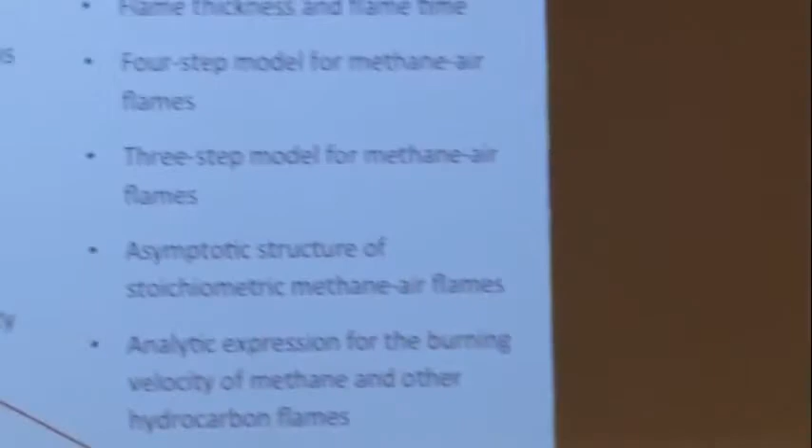So we talked yesterday about two things I want to point out. We talked about the analysis of the four-step, or really the three-step, model and the asymptotic structure that results from this, and then also an analytic form of the burning velocity. And it is quite revealing.

There are a lot of things that are interesting here. This was from the... You see, for example, how this burning velocity depends here on the fuel mass fraction is linear. You see how it depends on the inner layer temperature.

There's a lot of stuff hidden here in these rates and equilibrium constants. And then this is interesting: it depends on this temperature here, or this Zeldovich number, to the fourth power, which is the adiabatic flame temperature minus the inner layer temperature, to the fourth power.

And because at high activation energy, we said yesterday that difference is very small, actually. You can imagine that now when you change the fuel mass fraction — I said it's linear in the fuel mass fraction. That is right, I mean, that's the way you see it here.

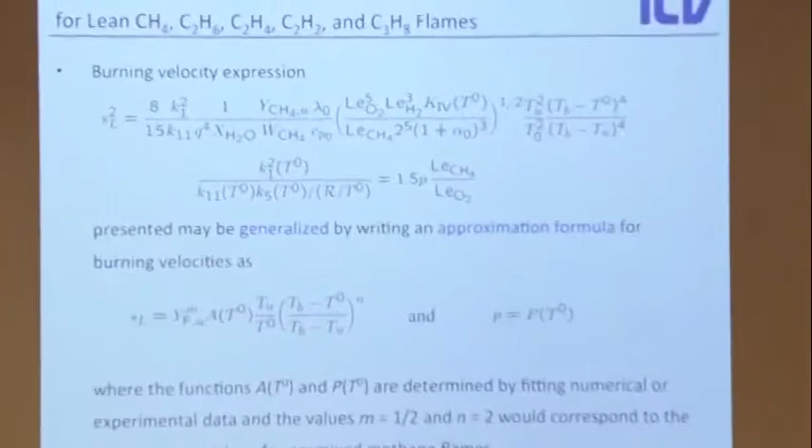We think the unburned temperature has a strong influence. Of course, the unburned temperature adds to the adiabatic flame temperature, but really, the unburned temperature here — this is a large difference anyways, this doesn't change very much. But this here, it would change a lot. So that's one of the things to take away from this.

And then last time we looked at — we said, okay, if we want to come up with a fit for the burning velocities, then having the right basis function for a fit would give us a very accurate fit. But now we have an analytic solution that was derived with some assumptions, but it's an analytic solution. And that analytic solution gives us an idea how a basis function should look like.

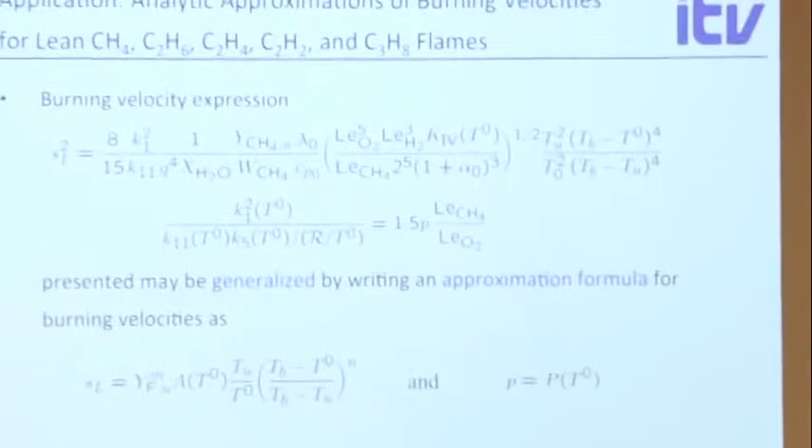And so we do something like this: pressure here is an exponential of temperature, which is what all these K's here say, really. And then we keep this form here to the nth power, and so on. We keep the T naught here explicitly in the fit function. And so this here just has a few constants.

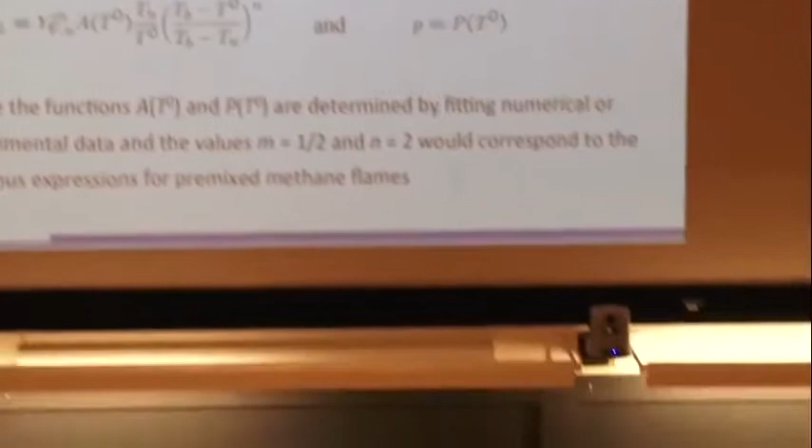Okay, so that is that, and then we said we want to talk here at the end briefly about flammability limits, and the reason why I repeated what we did last time is because it's related to this also.

So lean and rich flammability limits are a function of pressure and temperature. Lean and rich flammability limits are basically what happens: you have a flame, it moves. If you make it lean, it moves slower, and at some point the flame goes out, or it doesn't move at all. The thermal flame theory would tell us it would get slower, but there's no reason why it should really stop. And there is a reason - we'll see that later on.

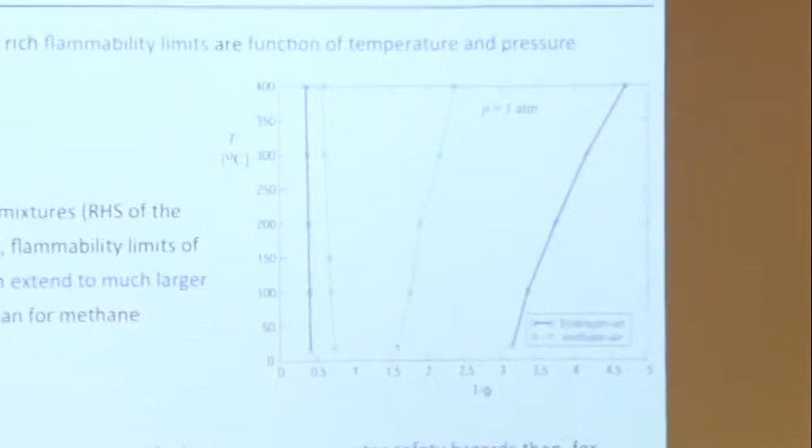But this here is from experiments, and what you see here is this is the temperature, unburned temperature for this premixed flame. This is 1 over the equivalence ratio. So this here is rich on this side and this is lean on this side. And especially lean flammability limits are of concern.

Why? Because the flammability limit is important because you might have a leak. You might have a fuel storage, maybe a natural gas tank. There might be a leak, and then you have fuel coming out, or maybe you have a gas stove at home. You have fuel coming out, and then in the kitchen or whatever, you add fuel to it. It gets richer, and then there's some point where it would start to burn. So the lean flammability limit is usually the one that is of more concern.

Interesting here is this is hydrogen, this is methane, and you see methane - hydrogen burns at much leaner conditions than methane, and that's why hydrogen is dangerous. Imagine you have this in your car. People talk about using hydrogen in a car. You have a tank. If you have a very small leak and you get relatively small concentrations of hydrogen, it forms a flammable mixture.

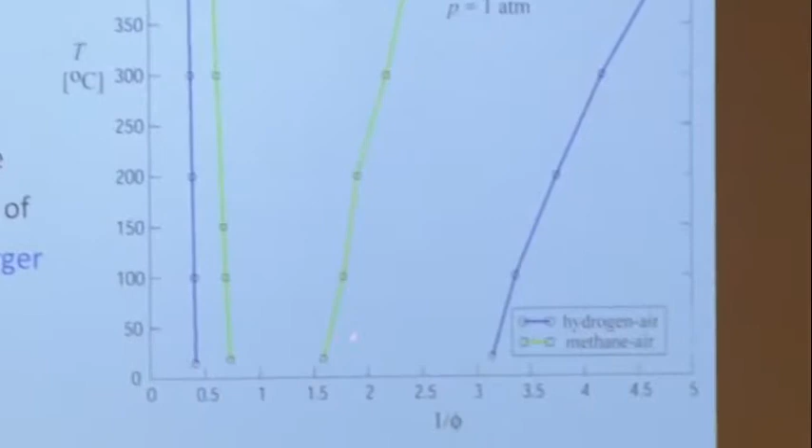So there's pressure here. What you see is if you increase the temperature, then you can make the flammability limit go to leaner regions. That makes intuitive sense. When the temperature is higher, you can burn leaner mixtures. Okay, so let's see if we can explain this.

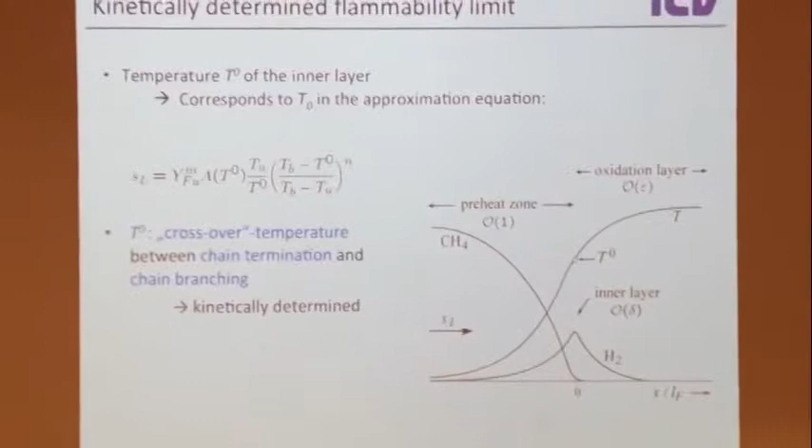We talked about the inner layer temperature here, and we had this. Now we can just use it to look at this fit function, just to give us a clue what's happening here. What you see here is basically the same functional form as the result from the analytic solution. What you see here is that you have this TB minus T naught. And as I said earlier, if you change your unburned gas composition, you change TB also, the adiabatic flame temperature. You make things more lean, the adiabatic flame temperature is lower. And so here at the end of the day, you might reach a point where TB is equal to T naught. Then you see from this formula that SL would be 0.

So we can identify TB equal to T naught. We can identify this with the lean flammability limit. And you see that if you consider multi-step chemical kinetics, then there is a kinetically determined point where combustion cannot happen anymore.

So now we can look at what determines these values, TB and T naught. T naught in this fit formula here, at least, is independent of the temperature, of the unburned temperature, and also of the fuel mass fraction. It only depends on the pressure. So a given pressure gives you a given T naught. And then the only thing that varies here is the adiabatic flame temperature.

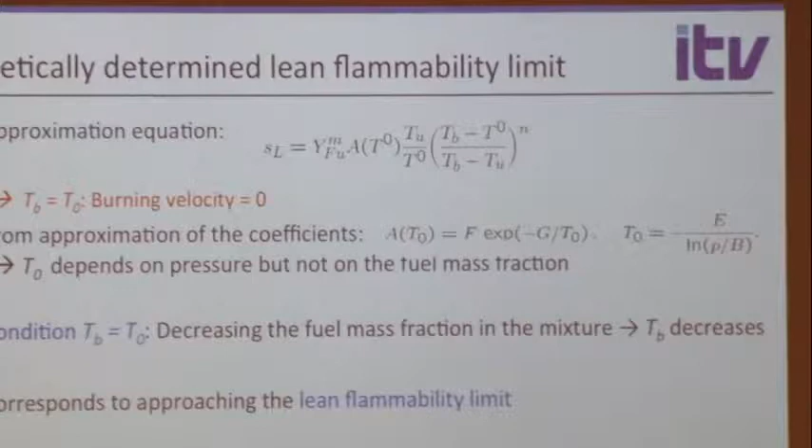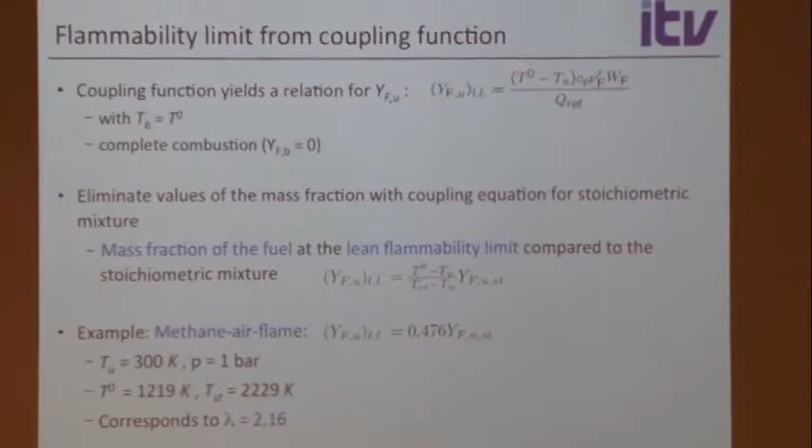So then the TB can be determined here from the coupling function again. We have the coupling function - I put the wrong one. No, did I put the wrong one here? No. So we said, okay, this is the coupling function, written now for this point where you would just get extinction. At this point where you would just get extinction, you have on the left-hand side Y fuel unburned at the lean limit minus Y fuel burned. And because at the lean limit the fuel should be all consumed, this is 0. And then on the right-hand side, you have here this - we said TB should be equal to T naught. So T naught minus TU and this, okay?

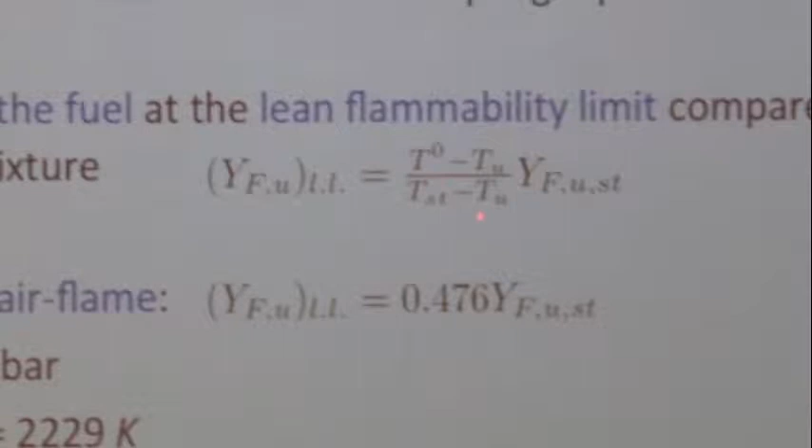And so if I write the same relation here for stoichiometric conditions and divide this here by the rates at stoichiometric conditions, by the value at stoichiometric conditions, I get this. And then you see here, this gives you now an analytic expression for the lean flammability limit: T naught, TU, T stoichiometric - so this is the adiabatic flame temperature at stoichiometric. These can all be determined. Y fuel stoichiometric also can be determined. And so you get, for example, here a methane-air flame at these conditions. This is the adiabatic flame temperature. This is T naught.

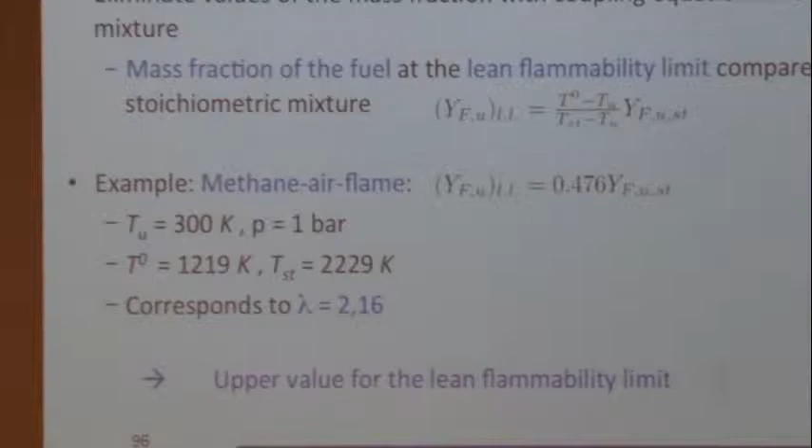That's the upper value, an upper limit for the flammability limit, because there might be other things. Here we just looked at this kinetic effect, and there might be other things that also make the flame burn slower. So we can compare this with experiments.

These are experiments for lean flammability limits for methane. This is the mole fraction of methane at the lean flammability limit as a function of the unburned temperature. This is the experimental data, and this is the curve that we just obtained, and you see it's a little lower.

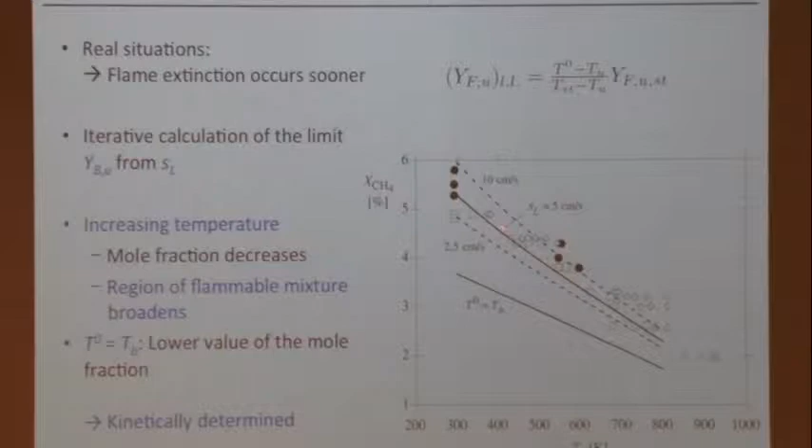This is the curve for SL equal to 0. You might say maybe the flame stops burning at SL equal to 5 centimeters per second. If you do the same thing for 2.5 or 10 centimeters per second, you see the trend is observed very well, and quantitatively this seems okay. So something between 2.5 and 10 centimeters per second is maybe where the flame stops burning.

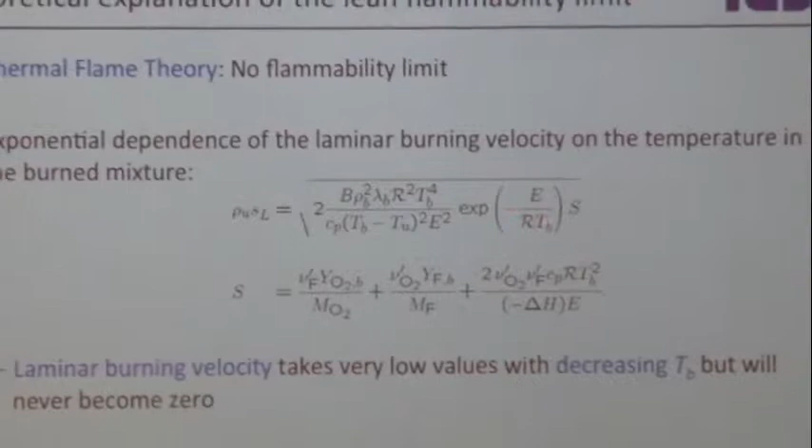So what other effects could be important for this? Again, thermal flame theory would not give you a flammability limit, because TB can get smaller as you make it more lean, but that just means SL gets exponentially slower.

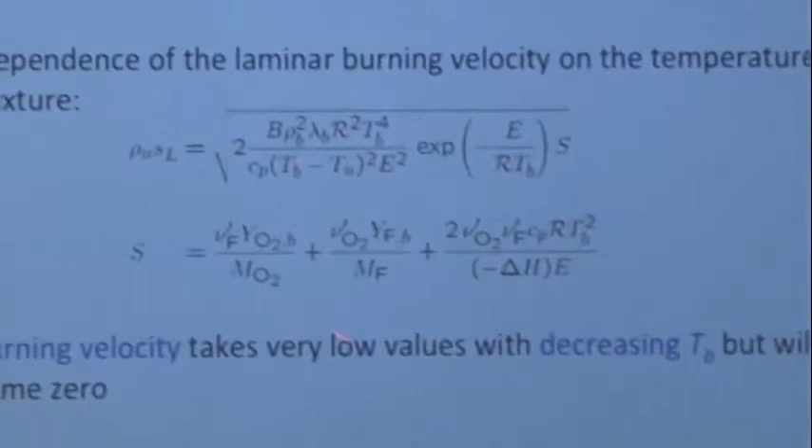But you could also imagine it's not just kinetics that make the flame go out. When a flame burns very, very slowly, heat losses due to radiation also become important. The flame burns so slowly, has heat losses through radiation, and just goes out because of the cooling effect. If you consider this, you'd also get a flammability limit, and that explains why this might be lower than the actual value.

So we talked in this lecture about—well, the previous lecture we talked about the kinematics of a flame. Here we talked about the structure: first, the thermal flame theory, where we just have a one-step global reaction. We said there's no competition of radicals, so it's not the full truth, but there are some things you can learn from this already.

But then we looked at the asymptotic analysis of the methane-air flame based on the 4-step, 3-step, and 2-step mechanisms that consider the radicals and their competition. The competition of the radicals gives you the competition of chain branching and chain breaking, which gives you this inner layer temperature—a condition for a temperature you have to reach to burn, or under which extinction will occur. That then explains some of these trends you see in the burning velocities, but it also can explain the flammability limits.

Any questions about this before we move on to the non-premixed flames?

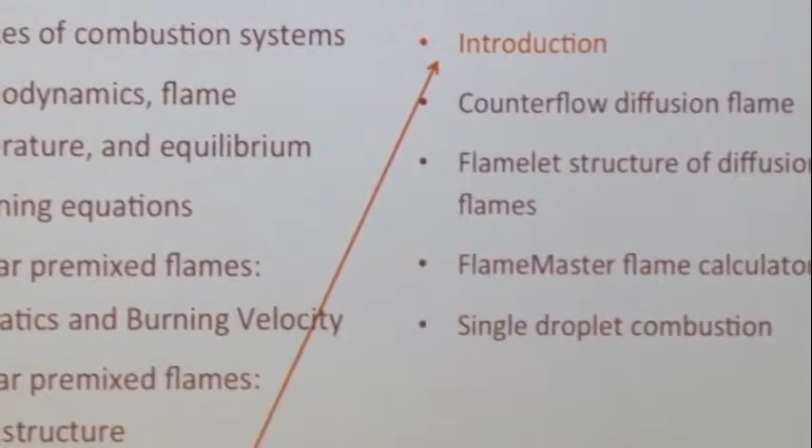And at the end, since Professor Law asked me to put in more CFD, I want to show some CFD of laminar flames—how you can compute all the things we discussed so far. I also have a section on single droplet combustion, which is interesting, but I decided to skip it since Professor Reitz covers single droplet combustion and multi-phase combustion in his session anyway.

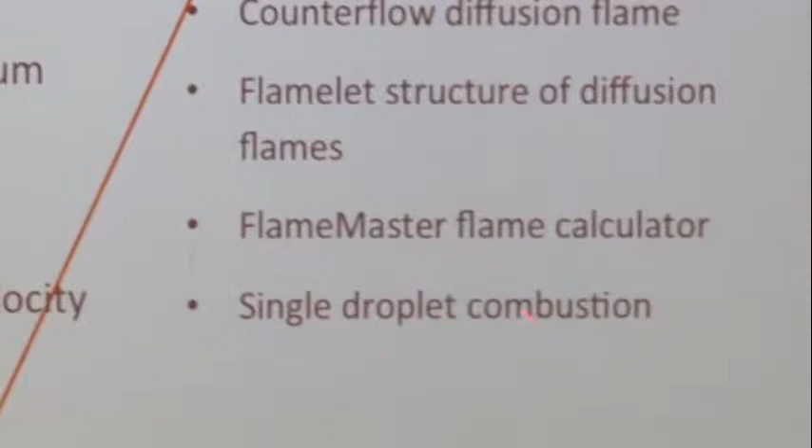Diffusion flames - this is not a laminar flame, but diffusion flames in general. We said there's premix combustion, non-premix combustion, and everything in between, but why would you use one or the other?

Premix combustion has very high heat release per unit volume, so you can make things small in a sense, but it's a little more dangerous.

Non-premix combustion is used when you don't want a premixed fuel-air system that could explode, and often when you want to burn liquid fuels.

This is an example of a spray injection in a diesel engine - an experiment we do in Aachen. You have an injector, and the liquid fuel comes out, evaporates, and starts mixing with the air. Then all of a sudden you see the ignition point and how burning takes place. This is a shadow or Schlieren image, and you see the flame liftoff here, roughly here.

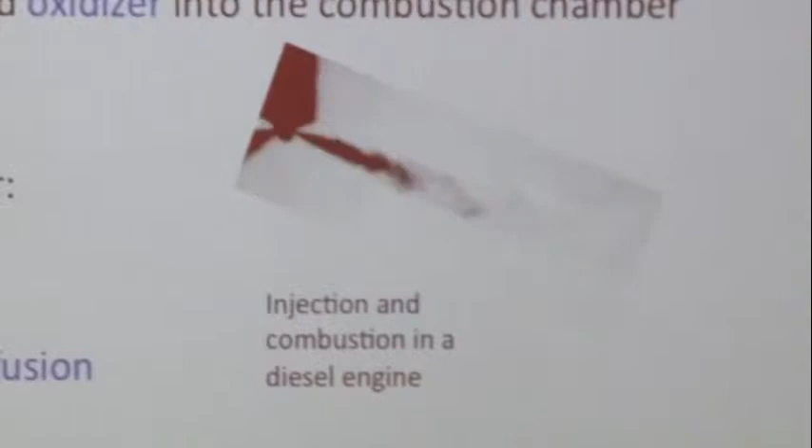In diesel engines we use non-premix combustion. Why? Because the fuel is supposed to auto-ignite. If you mix it first, that's actually what you do in HCCI engines - you mix fuel and air first, then compress, and it auto-ignites.

But then it's very hard to tell when it will auto-ignite, because if you have a little more exhaust gas recirculation from the previous cycle, the mixture is a little hotter, then it will ignite a little earlier, and so on. So it's very hard to control when it ignites.

In a diesel engine, you compress just the air, and when the air is at high pressure, you inject the fuel, and very shortly after that - 1 millisecond typically - the fuel will ignite. So with the injection point, you control when you want to burn.

Professor Reitz will also talk about this, but the reason you compress just the air is because you can compress pure air much more than a fuel-air mixture. A fuel-air mixture would ignite much earlier, so with pure air you can compress to a very high compression ratio, then inject and burn, and that high compression ratio gives you good thermal efficiency.

In the combustion chamber - this image, by the way, I took using this exact burner that we have here, and we'll light it up again later on - fuel and air mix, and then it burns.

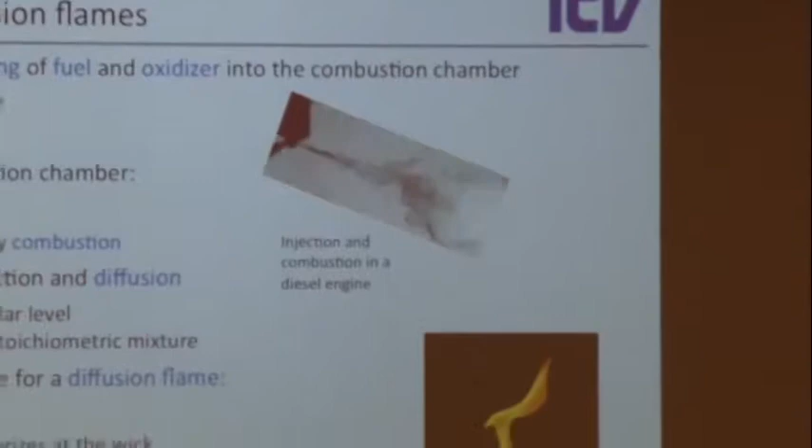Mixing happens through convection and diffusion. What's interesting is that the fuel comes in, and you have the air around it, and even with turbulent mixing, the fuel and air can only really burn if they are mixed on a molecular level. They really need to diffuse into each other, because otherwise the molecules don't come together. We'll see later that this is really an important aspect.

Typically things burn where you have a locally stoichiometric mixture. Why? Because it could also burn where the equivalence ratio is just a little lean or a little rich, but typically it's stoichiometric conditions - imagine if it burns everywhere.

As we saw earlier, in the rich part there's no oxygen - it's all gone, and you just have fuel left over. In the lean part, you have no fuel, just oxygen left over. Just at stoichiometric conditions, things come together in stoichiometric proportions, and that's where it burns out. Once it burns at stoichiometric conditions, you can't burn in lean conditions anymore because there's no fuel, and on the rich side there's no air.

So you have the stoichiometric conditions, and the fuel and air diffuse to this point, come together at exactly stoichiometric conditions, and are consumed there, and then the products diffuse away.

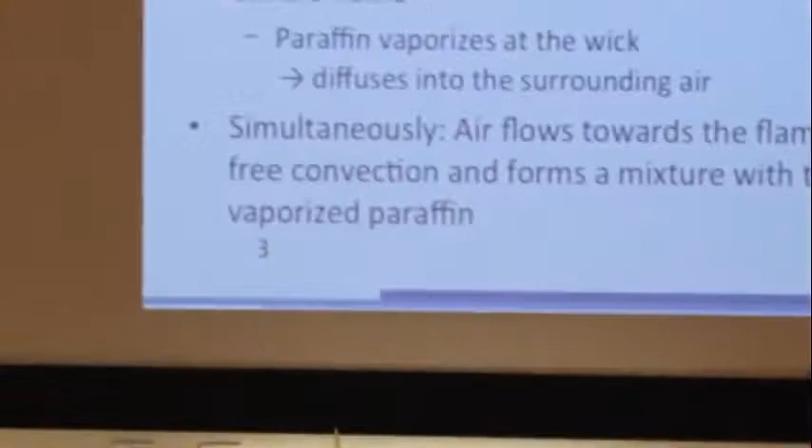A simple example here for the diffusion flame is, of course, the candle flame. You have the solid fuel vaporizing at the wick, and it vaporizes and diffuses into the surrounding air. Other examples are the cigarette lighter, and here my little blowtorch.

Okay, so this is how this looks like, you've seen this before. You have the fuel evaporate here. It's very rich in this part, it's very lean in this part, but then the fuel diffuses outwards.

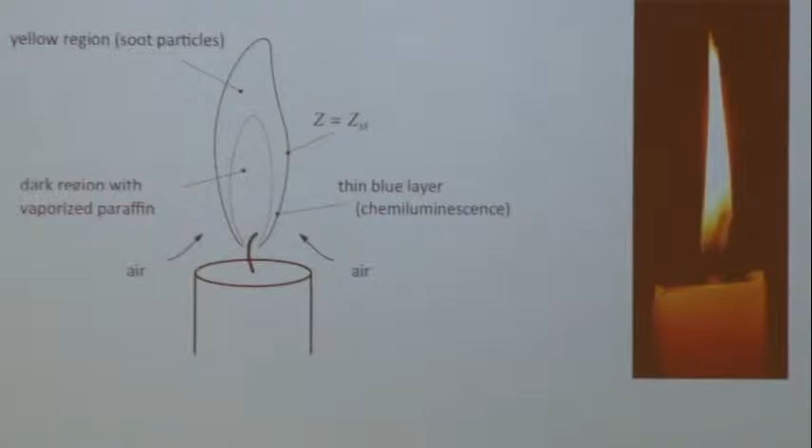The air diffuses inwards. And you would think at some point the diffusive flux would stop, because everything is mixed out. But combustion always consumes fuel and air roughly at stoichiometric conditions.

So if you have fuel come from here, air come from here, and you just let them mix, then at some point there are no gradients anymore. But the combustion process itself keeps the gradients high, and that's why things keep going.

If you look very closely, if you take your little cigarette lighter, again I forgot to bring one, but if you take a little cigarette lighter you should do that, and look at the flame. You should do this again. I always take this off because there's a little leak. So I used to have this in my office, and then I fall asleep, and I think, oh wow, this feels good.

Where's the gentleman who had this? So I take this thing off, and nothing comes out. So I need to close this first. I lost my tape here. Okay, so I hold it with my fingers, but I can't do this for only so long because this thing gets really warm.

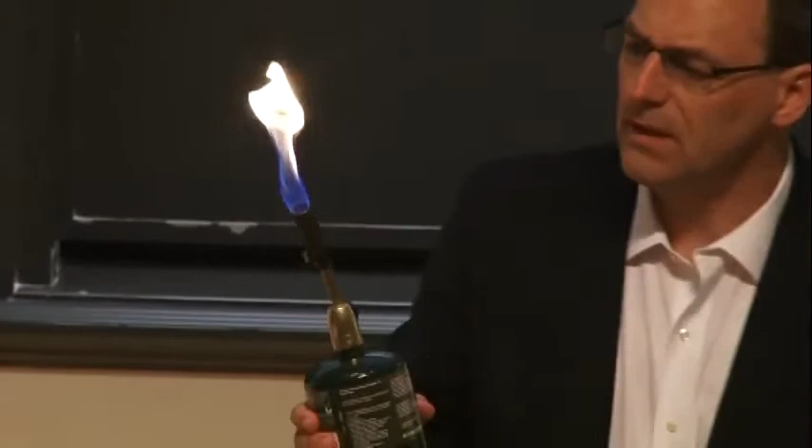So what I want you to see is that if you look very closely to the nozzle, you still see the blue color. We said last time this is from chemiluminescence of CH and OH, things like that. C2, I think, is a little greenish, so that makes it a little light. That's why you get the light color.

Then if you go downstream, you see that yellow color, and the yellow color is soot. Soot particles, smoke particles that form here, and they just glow. This is the orange color.

And what's interesting is you don't see any smoke coming out here. You see smoke coming out? No. Also from your candle, typically you don't see smoke coming out. Why is that? Because the smoke is formed and it travels through this flame.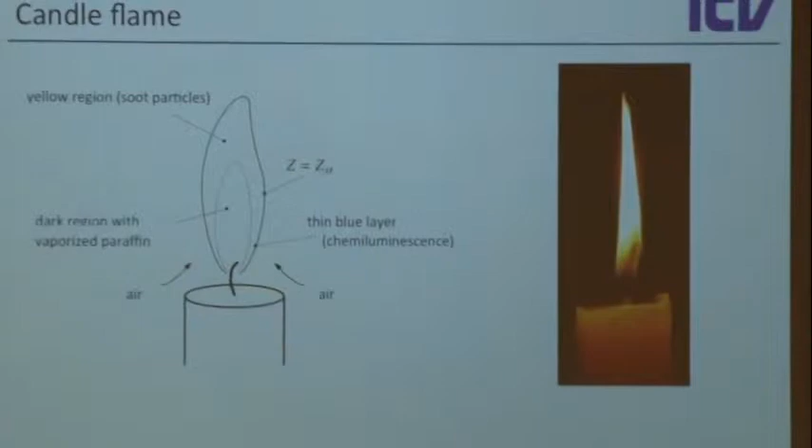Let me go back. You saw the blue color close to the rim. And if you look closely, you see it's a very, very thin sheet. You check this out with a cigarette lighter - you look at your cigarette lighter, it's a very, very thin sheet. And that thin sheet, you see close to the nozzle, and then downstream you don't see it anymore.

So that's the reaction zone. Downstream you don't see it anymore, but it's still there. The only reason why you don't see it in your cigarette lighter is because you have this very, very bright orange color, so it's so light that you don't see the weak blue light anymore. So the blue light is still here, and it's exactly at this interface that you see.

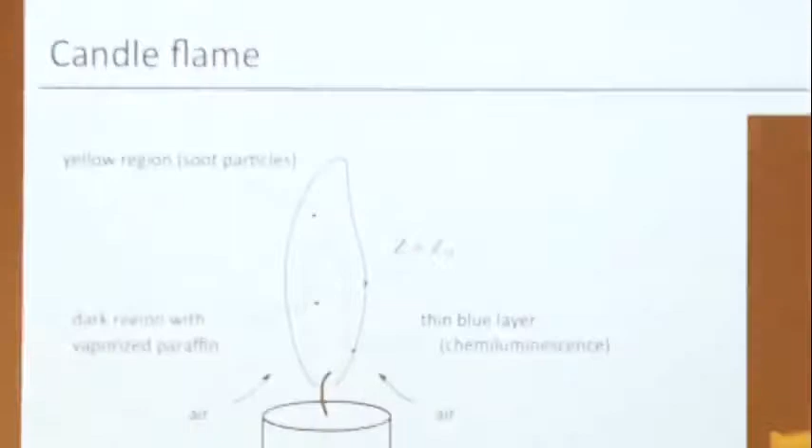It's just around this. So this is rich, so you form the smoke, and the smoke is glowing here, and at some point the smoke has to go through this reaction zone again. Once the smoke hits the reaction zone, which is stoichiometric, then it just burns away, just like the fuel. That's why you see this very sharp interface - this is exactly where the reaction zone is.

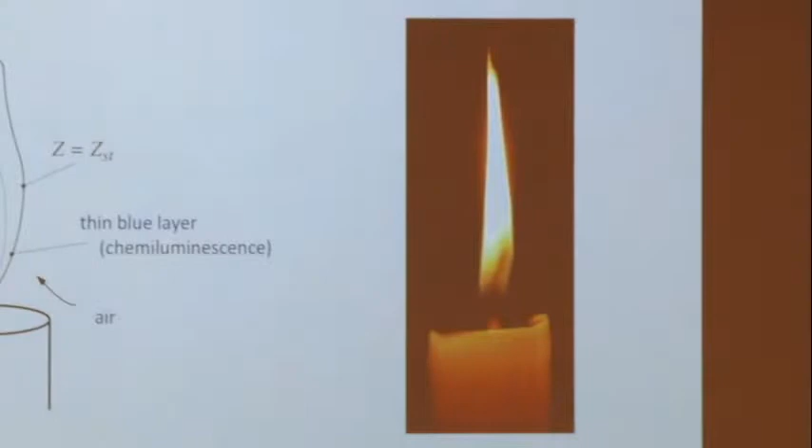Now you see this flame here is almost opening. If you straighten the wick, then you see sometimes the smoke coming out. Why is the smoke coming out? Because the time for the soot to oxidize is not enough.

So, for example, if you take this thing here and I shake it around, let's see if that works.

Now see this, okay, like this. I did this once in class—you see smoke coming off? Maybe not. This thing here is not attached, so I was going like this and it flows off and flows into the window. It didn't break the glass, but the students were really scared of me from that day on.

So if you do this, sometimes there's not enough time. If you do this, you increase the scalar dissipation rate—we'll talk about this later on—you decrease the residence time, and the soot doesn't have enough time, so it comes out.

The other alternative is, for example, in your candle flame—try this at home—take a knife, fork, or spoon and hold it in the flame, and you'll see smoke coming off. Why? Because putting this in, you locally quench the flame. The reaction zone is like a protective force field around the soot. The soot cannot come out without oxidizing, but if you disrupt this by locally quenching the flame, then the soot can come out this way.

And yet another way, as I said, is you straighten out the wick, and then the flame gets longer. If the flame gets longer, it can open up at the top, and you see this here is almost opening up. Why does it open up?

Okay, so premixed and diffusion flames are different. Again, we should know this by now, but fuel and air here come from this side. They diffuse in, first heat up, then reach the inner layer temperature, and then they burn. The reaction rate here also keeps the fuel and air mass fractions low, which is why you keep up the gradients and so on, keeping this thing going.

The diffusion flame is different: you have the oxidizer come from this side, and in this candle, the fuel comes from this side. They diffuse into each other and meet at this stoichiometric point, where they burn, which increases the temperature. Then, of course, you have diffusion of thermal energy away from this point, so you heat up the fuel and air by this diffusion process, and at the same time you form products here—CO2 and water—which also have to diffuse away. Because this whole thing is driven by diffusion, we call non-premixed flames also sometimes diffusion flames.

Yes? Well, you mentioned the slide that I was actually going to ask about, but just to clarify—so the soot and carbon we're producing, I'd always understood that was a result of incomplete combustion, but what it sounded like you were saying before, in the case of candle flames, is that it's really the result of thermal decomposition of the paraffin before the flame, and then passing through the flame, the soot is oxidized. So which one is it?

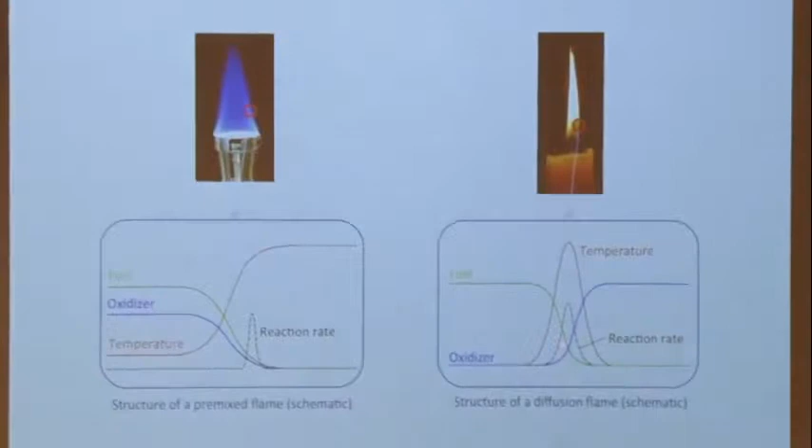Particles don't diffuse - this is interesting. Particles do not diffuse because they're particles, not molecules, they're too heavy. What happens is you form this particle very close to the reaction zone, and then the particles, they don't diffuse, but the fuel diffuses. So you have a particle here that doesn't diffuse, but the fuel diffuses.

This means relative to the fuel, you move the particle to the rich region, so that moves it away from the flame. That's good for the particle because it doesn't want to be oxidized, doesn't want to burn its fingers. But then, when you go towards the tip of the flame, all the fuel disappears.

So at some point the soot also gets pushed into the reaction zone, and then it burns out. And if it comes out instead, that's incomplete combustion. That's correct, but what I was describing is the exact physical mechanism of how this happens.

Now, I promised I would tell you why soot has to form very close to the reaction zone. Why does it have to be very close? Why don't you form soot at very, very rich conditions? Why only close to the reaction zone?

You need a little oxygen - that's one thing people always say, you need a little bit of oxygen to form soot. But why is that? Really, the reason is you need radicals. And if you want radicals, we said you get radicals from O2 plus H. If you don't have radicals, things don't happen.

Under rich conditions, you would also form these very large things, but in a flame where you don't have much time, you need radicals, and that's why things happen very close to the reaction zone. So soot is interesting - soot has an interesting, dangerous life. Soot is a danger seeker because it can only form very, very close to the reaction zone, but if it hits the reaction zone, it's gone. So soot has an adventurous life.

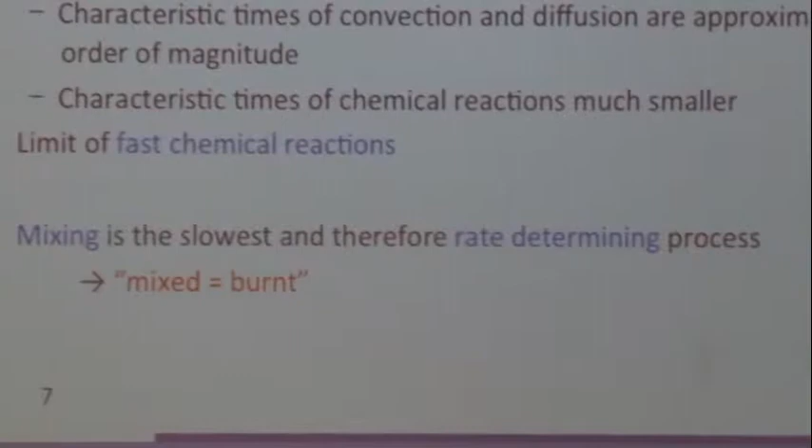One very simple model you can use for non-premixed combustion is mixed-is-burnt. Whatever fuel and air mixes, you assume it burns instantaneously, and then you don't need to worry about chemistry or kinetics at all. You could just use mixed-is-burnt. If you say it burns to complete conversion, you can just use this Burke-Schumann solution that we had earlier, and it's very simple.

But for other things, it's not so good. For example, pollutants are formed on slow time scales, so that assumption is not the case.

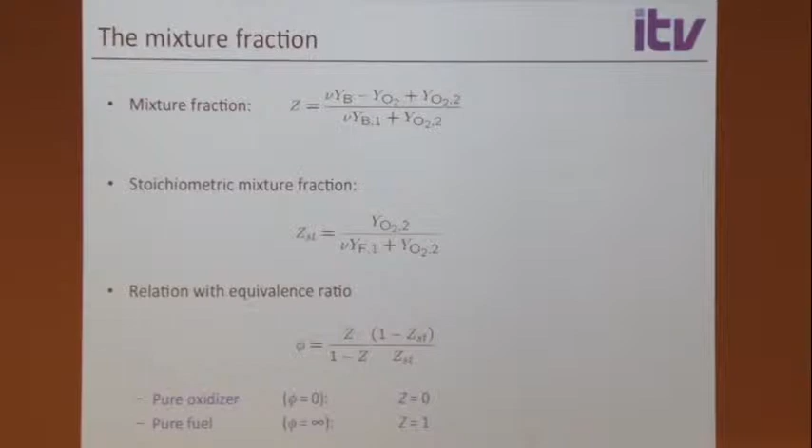Now, mixture fraction—we introduced this earlier, this is just a summary again. This would be a definition of the mixture fraction. Stoichiometric mixture fraction is determined like this, and there's a unique relation here between mixture fraction and equivalence ratio. So again, you can think of mixture fraction as just being the local equivalence ratio. You're very rich here at the core of the flame, very lean, or zero actually, in the pure air, and then it's stoichiometric somewhere in between.

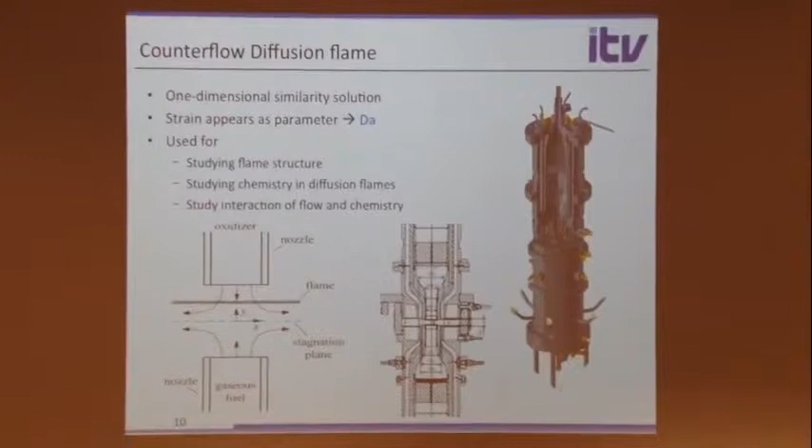So let's talk about some experiments people do to look at diffusion flames or non-premixed combustion. As I said earlier, anytime you want to look at kinetics, it's good to do experiments in a configuration that can be computed easily. You want a one-dimensional configuration, but that's hard to do.

For the premix flame it was relatively easy—you just have a fuel-air mixture, homogeneous fuel-air mixture coming in, and that gives you a flat flame. For non-premix combustion it's a little harder, so what people typically use is what's called a counterflow diffusion flame.

You have two nozzles, one on top, one at the bottom, generating flow against each other. You have fuel in one and oxidizer in the other, and you form a stagnation plane in between. Then you get the flame there, typically on the lean side of the stagnation plane.

This is how this thing could look like—a design we run in our lab. You need to do a lot of work to actually make the flow spatially homogeneous enough that you don't get local flow effects. One of the key issues in a design like this is to create a flow that has a top hat profile.

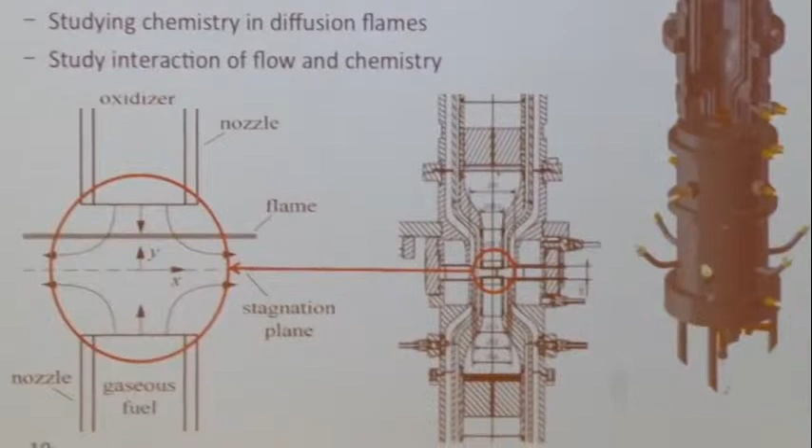If you have a profile like this instead, it's not good—this is not a 1D configuration. I said earlier we want a 1D configuration, but luckily it turns out there is a similarity, one-dimensional similarity solution to this problem. So even though it's a two-dimensional problem, we can compute it in 1D with a similarity solution.

As I said earlier, if this is not a top hat profile, it turns out you can't derive a similarity solution, so then it doesn't work. An experiment is very important to ensure this top hat profile, and we spent considerable time measuring velocities and changing the design to make sure that's what we achieve.

I want to show you the equations that you solve. These are the equations here—you see something is cut off; this is supposed to be a y. V is the velocity in the y direction. U is the velocity in the x direction.

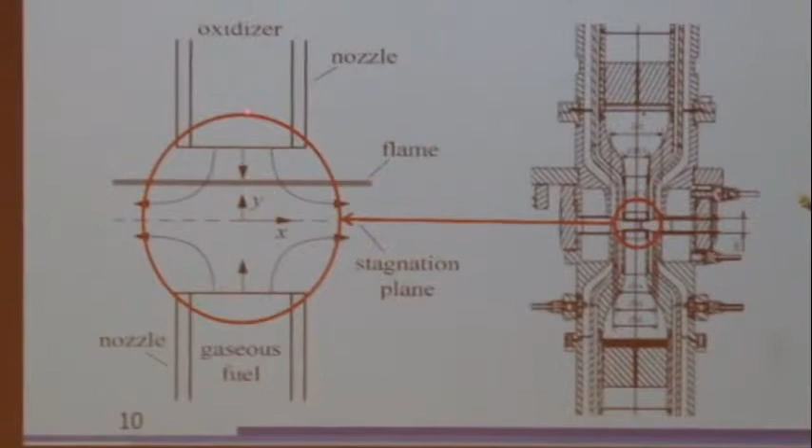Let's go back and see what the coordinate system is. You see the flow direction, the main flow direction here—the nozzles are in the y direction, and the crosswise direction here is x. The radial direction is x. Most people would do this, or some think it's more intuitive to go the other way.

Does anyone know why? Why do we typically use y to go from nozzle to nozzle? It's just interesting.

Yeah, but distance from center plane—but that's not the real reason. There's a reason why you use y in that direction. You could use the distance from center plane, call it x. Usually people use radial direction as r or y, and the main flow direction as x. Here it's the opposite. The flame is in the radial direction, and the immediate coordinate system transforms so x corresponds to the radial direction. But that's not the reason.

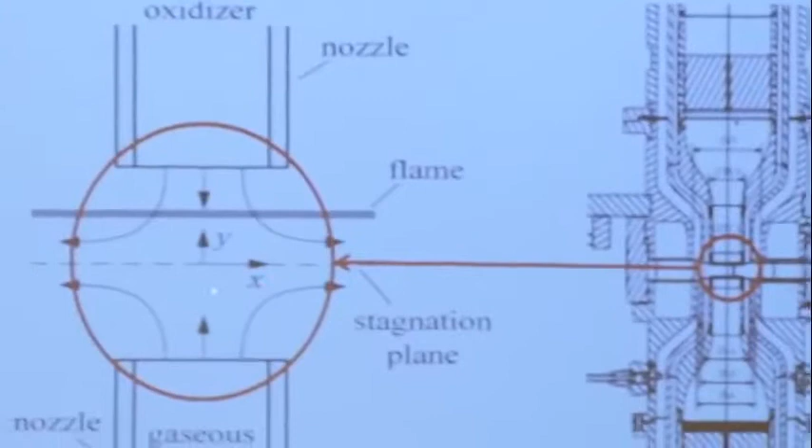The reason is this is basically a boundary layer assumption. A stagnation point flow, you see the stagnation point flow here, this creates something like a boundary layer. So the similarity solution here is very similar to all the similarity solutions you get for a boundary layer—Schlichting's book, boundary layers and stagnation point flows and so on. In the boundary layer, the crosswise coordinate is y. So for the boundary layer assumption, this is really the crosswise coordinate. Anyway, it's not that important. I just wanted you to realize that v is the velocity that goes from nozzle to nozzle, and u is the one that goes radially out.

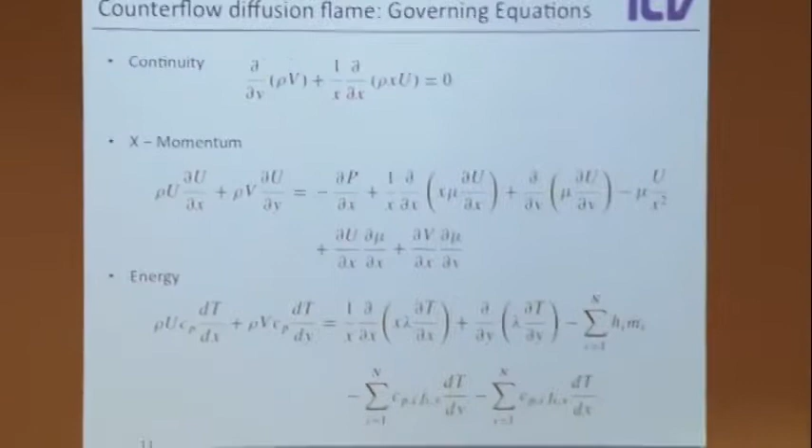So this continuity equation is written here for this cylindrical coordinate system, and this is the x momentum equation, so this would be the radial momentum. Turns out you don't really need the other one. Then this is the energy equation, so you have your convection terms, and here these two diffusion or heat conduction terms, chemical source term, and this is the flux of energy by species diffusion, and so on. This is two-dimensional.

Now we want to derive the similarity solution, and here I'll just tell you what the assumptions are. First, you have a similarity solution for the velocity, which means you can decouple the solution in x and y. The assumption is that the U field can be written as g of y—g is just a function of y, not of x—times x.

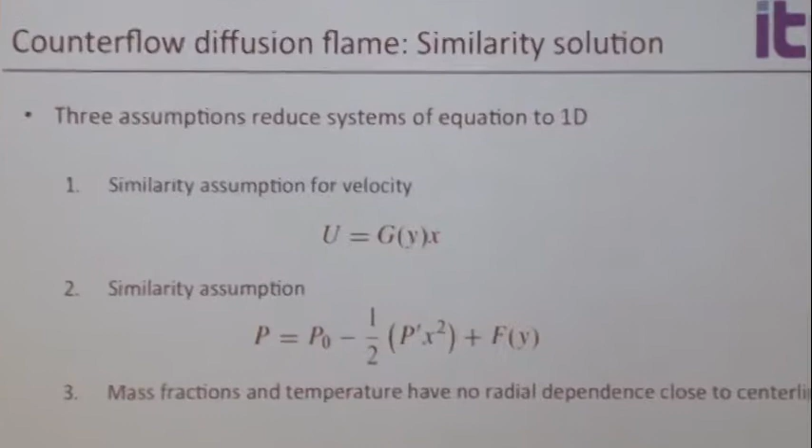So you could look at this g as something like a strain rate. If you assume g is not a function of x, then in the x direction you could say g is du/dx. So u is g of y times x, and du/dx would be the strain rate. So you could look at g as something like the local strain rate. This is a typical assumption—again, if you look at Schlichting's boundary layer book, it's very typical for these stagnation point flows.

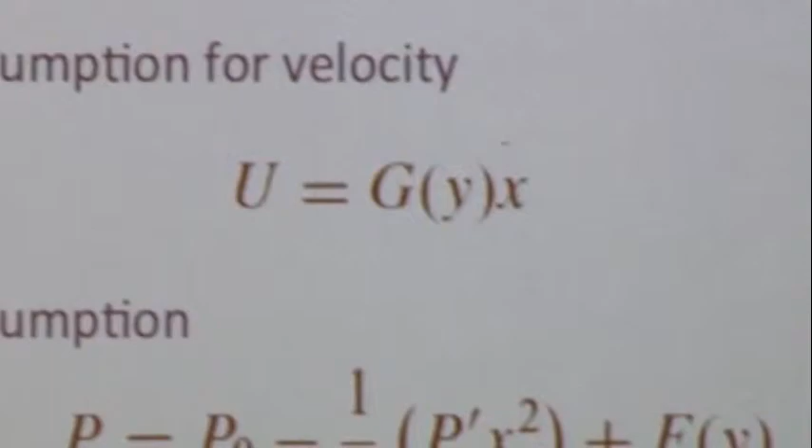Why is this important? Why do the boundary layer people, the aerodynamics people, look at stagnation point flows a lot? Because if you have an airfoil, you always have a stagnation point on the tip of the airfoil, and you want your boundary layer theory to start right at that point. That's an important point the aerodynamicists looked at a long time ago, and the combustion people just picked that up. So this here is something like the strain rate—this is a similarity assumption.

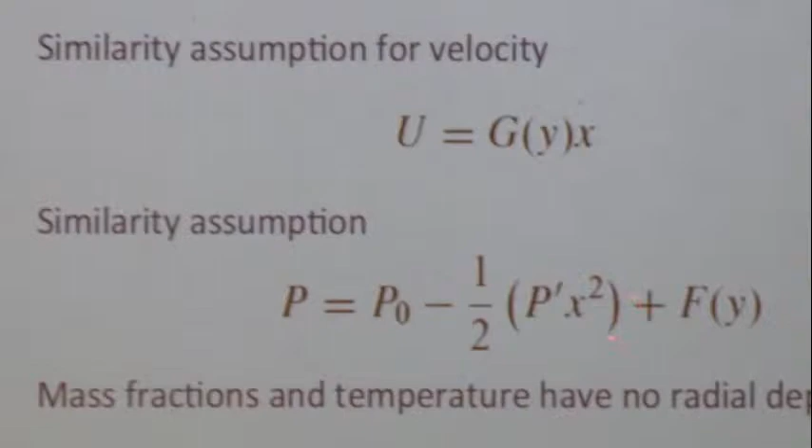And then the similarity assumption for the pressure also: you say the pressure is something like a background pressure—this would be the thermodynamic pressure—minus P times x squared plus F of y. So basically it's the same thing: you say you can decompose the pressure into a part that only depends on y and a part that only depends on x. That's the similarity assumption.

Turns out this is written in a way that, for those who know low Mach number theory, all this is in the low Mach number limit. If you look at the low Mach number limit, for the pressure you typically derive a Poisson equation, and this here satisfies the Poisson equation. That's basically what it does—it's an assumption that you can split these into functions of x and y, and this is chosen such that it satisfies the Poisson equation.

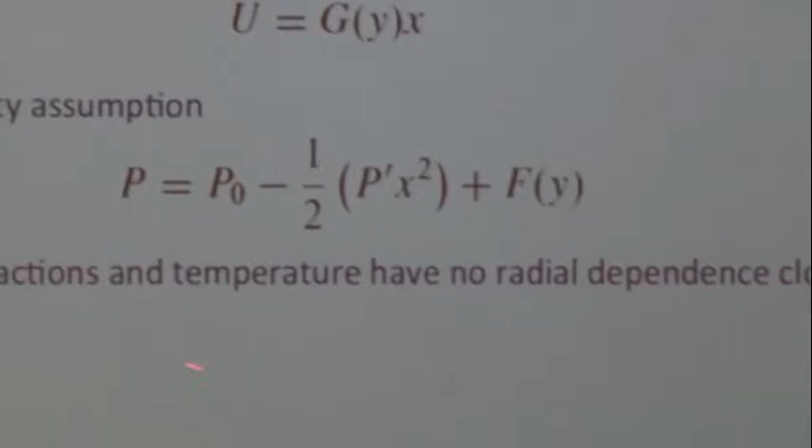The third assumption is that mass fraction and temperature have no radial dependence close to the center line. This means along these lines here, along the flame, the temperature and so on are the same—they're constant.

Okay, so if you plug this into the equations, you see that the x direction drops out, and you get a system of equations only in y. This continuity equation here - I said earlier you can look at g as something like du dx, and that makes sense in the context of the continuity equation. There's a momentum equation in G and in the x direction, and this here is the temperature equation. And there's one thing here - you have this P prime.

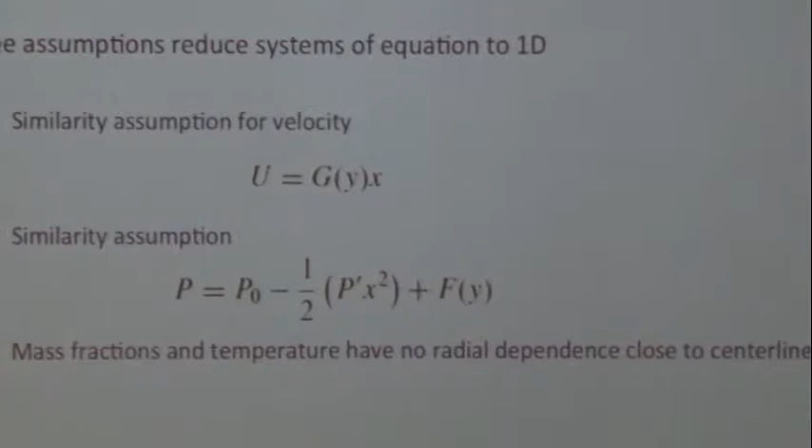P prime, what was this? P prime was just this coefficient here. So how do we get P prime? There's an equation missing, maybe. Because we have G, and we have V, and we have these two equations, okay? But now we also have this P prime. How do we get P prime?

Okay, let's think differently. What are the boundary conditions now on this? Boundary conditions are - we have, you need to specify on both sides, both nozzles, temperature and composition and all these things, but also the velocity. You specify the velocity here and you specify the velocity there. So I specify for both the v velocity and the g velocity or the u velocity, I specify velocities on both sides. Is that a problem?

And it's obvious, right? I mean, it's obvious that you need to specify both the u and the v component at both nozzles. Is that a problem? Why is it a problem? Because I have these two equations here for u and v, or for u and g, and this is a second order equation. I can specify two boundary conditions. But this here is a first order equation. How many boundary conditions can you specify for a first order equation? One, but I have two. What do I do now?

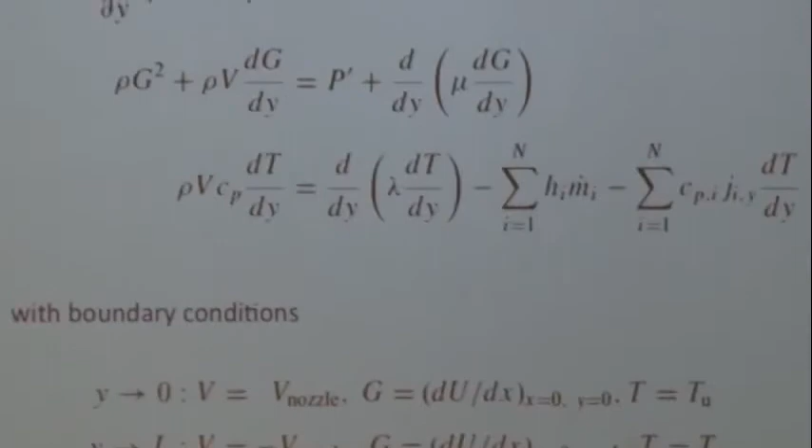Here the assumption is you have two nozzles. The nozzles have a certain distance. You have a certain velocity here on the upper and lower one. Typically you say, or very often you say, the flow is just straight, so the u component is 0. But as a matter of fact, in real experiments, that's almost never the case. So you do have a change in u, and so here you can specify this du dx gradient also.

There's another way of looking at this. Historically this is the standard way, and that is to assume - this is better for, so this formulation is good for experiments. You have an actual experiment, you can match it here with these equations. But for doing just analysis, there's another formulation where you assume the streams come from infinity. They come from infinity and then they meet right here. And so if the streams come from infinity, far away from the stagnation plane, then you have a potential flow. And so this is the similarity solution here, that assumes a potential flow far away from the stagnation point.

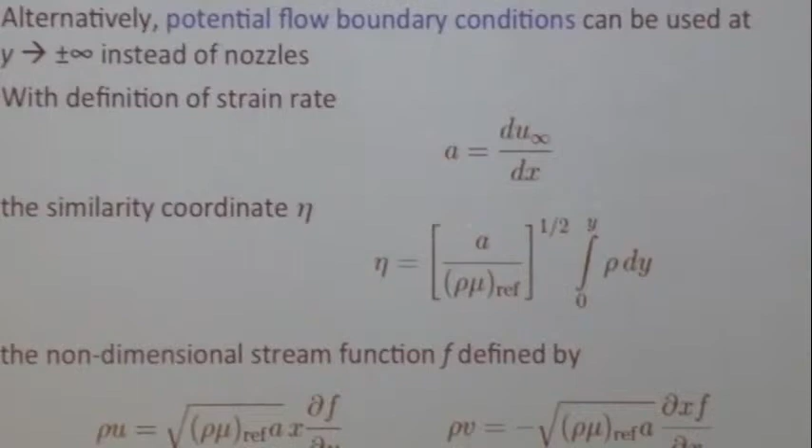I just want to show you these equations because you'll see them somewhere, and so that you know where they come from. Here, the du dx, we said earlier, that's basically the strain rate. And so the strain rate, du infinity - this du dx at infinity - that's how we define the strain rate here. We introduce a similarity coordinate. It depends on the strain rate, gives you a time scale, and this is a mass-weighted coordinate here. Rho dy is just a mass-weighted coordinate. So this is very, very typical for a similarity solution. If you look at all the exact solutions for boundary layer flows, they all look like this, basically.

You have a transport coefficient here which has a time scale, and then you have some other parameter here which gives you a time scale. Typically also this factor of 1/2, this 1/2 here, is what you get.

So then we introduce the stream function. Why do you introduce the stream function? Because that's good for analysis. Instead of solving for u and v, you solve for the stream function, and then you satisfy the continuity equation exactly just by introducing the stream function. Then you have one equation less. So for analysis this is good. That's why people do it. So introduce the stream function.

U is basically df dy. F is the stream function, defined so that u is df dy and v is minus df dx. That's the typical definition of the stream function. If you take the continuity equation and plug these two things in, you'll see that it's identically satisfied.

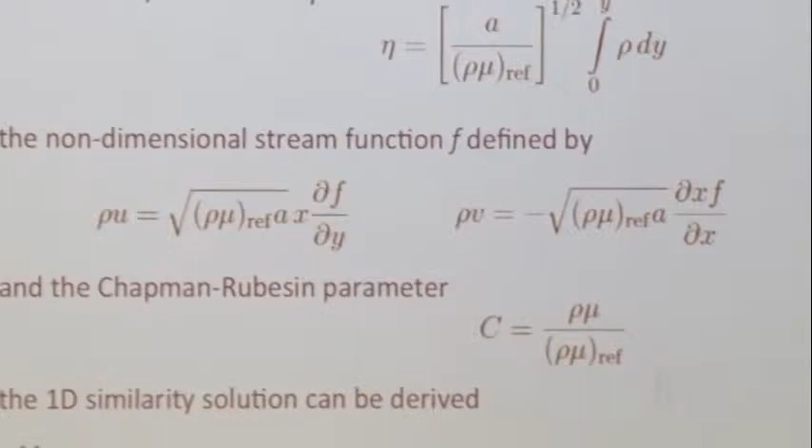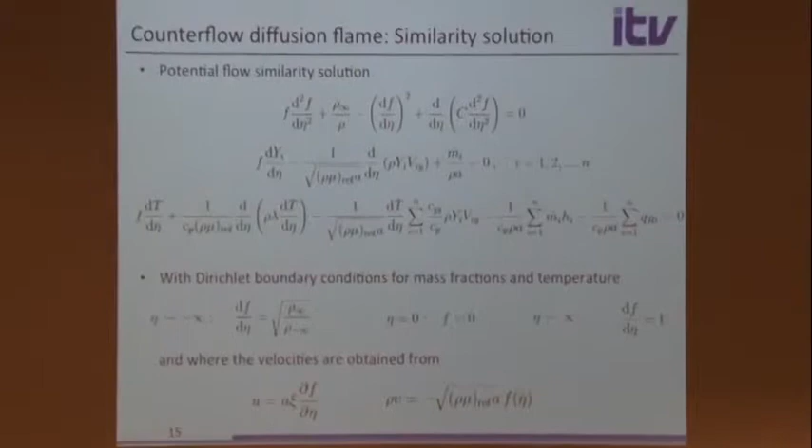No, the stream function you can always define. You can always use a stream function. It gives you one equation less. Why don't we always do this? Seems like you get something for free, but there's a saying: there's no free lunch. So what's wrong here? Where do we need to pay?

You need to take everything out of the similarity coordinate? No, because if you have the solution to this, then this last step here to compute u and v is trivial. Solving an equation like this is much, much harder than doing this here at the end. This is trivial.

Some boundary conditions you cannot match sometimes? No, boundary conditions here are good. You see df d eta here, f equals 0, and so on. This is all straightforward. Boundary conditions are not a problem.

Right, then we use the other one, but we could still do this. We could still introduce a stream function and get rid of the continuity equation. It doesn't make it always necessarily simpler. Why not? You're absolutely right, it's not simpler. But why is it not simpler? Look at the equations.

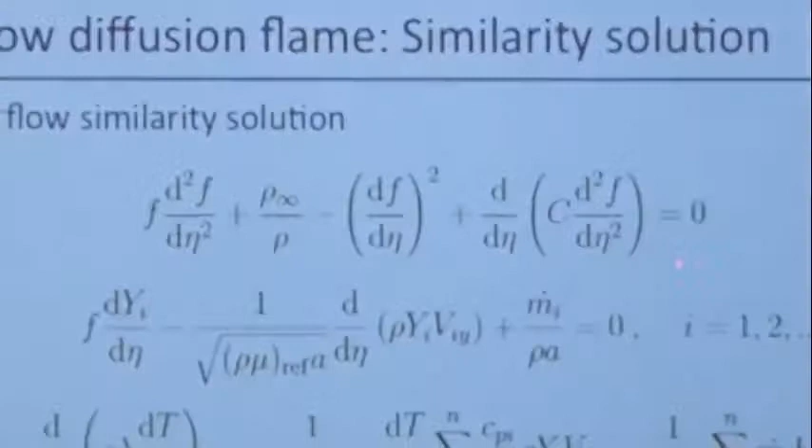Somebody said second order. What is the deal with the equation here? This is not the problem. Look at this, this is a third order equation. We started out with a second order equation, plus we had the continuity equation. We said we'd make it simpler by taking out the continuity equation, but again, there's no free lunch. Now we have a third order equation.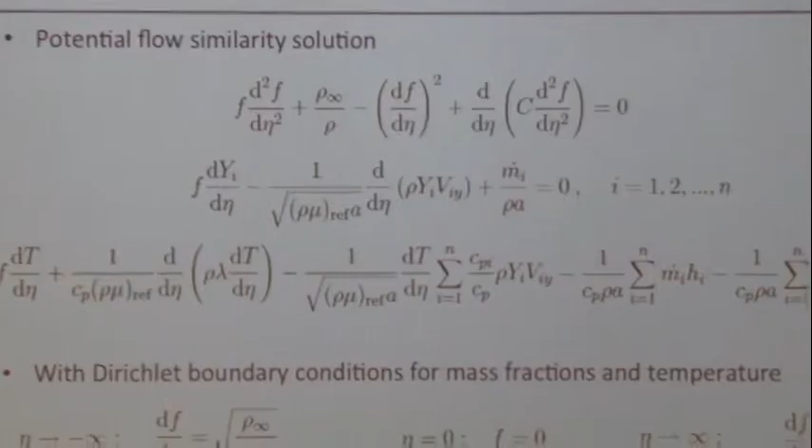So actually we go back to the original form when we solve it numerically, but for analysis this is not bad. So that's why for analysis you always introduce the stream function. When you actually solve it, you take it out again. There are stream function formulations in fluid mechanics, but anyway, if you solve this now, you can solve it.

Then this is what you get. Here we have the temperature profile for 3 different strain rates. So the strain rate now is a parameter, an independent parameter in this problem. And that's the nice thing about this configuration: you don't have this in the flat premixed flame we had.

In the flat premix flame, you have the unstretched flame with no free parameter. Here you have a fluid mechanics timescale that you can vary by changing the velocities of the nozzles. Very high velocities correspond to very high strain rate, very low velocity gives very low strain rate. Strain rate is the inverse of a time, so higher velocities mean higher strain rate, lower residence time, and this changes the Damköhler number.

So you go to a smaller Damköhler number. We look at three different temperature profiles here. There's one nozzle here, there's the other, it doesn't matter which one's which.

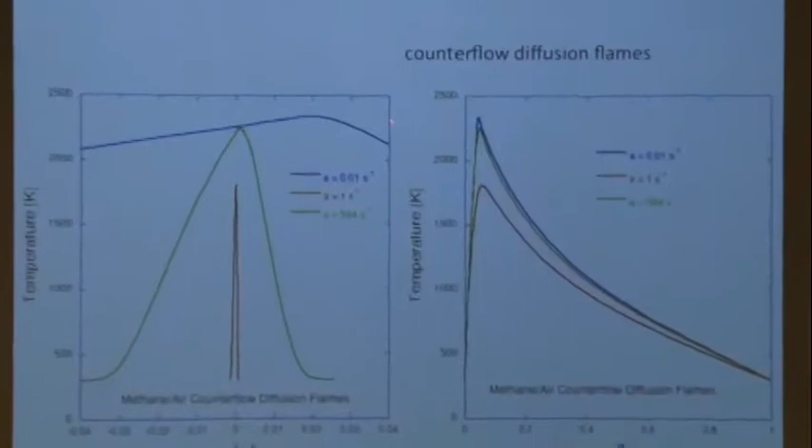So you saw that by changing the strain rate, you change the temperature. Why is that? Because you go to higher strain rate, you squeeze this flame so much that the gradients become so large that you can imagine very strong heat losses from this thing. Because the temperature gradient is very large, you have a very high flux of thermal energy away from the maximum temperature.

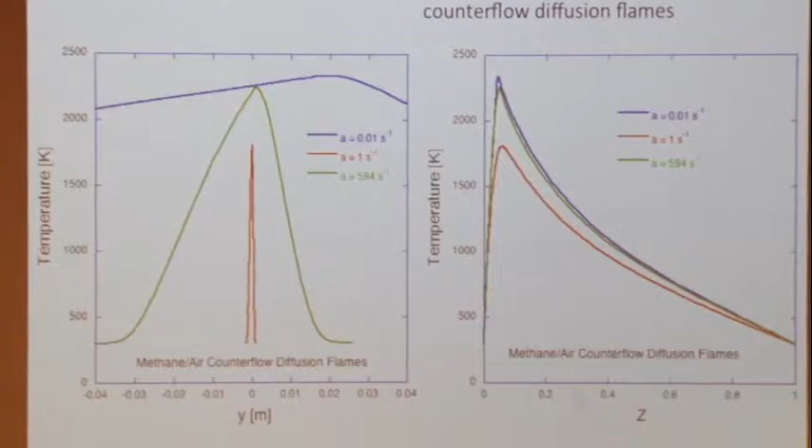So if I plot just the maximum temperature, or the stoichiometric temperature of each of these flames as a function of the strain rate, you see the temperature keeps going down, down, down, and at some point it just goes straight down and the flame extinguishes. Why does this happen?

Again, you go from here to here and you squeeze it more. Now at first, not much happens. You see the temperature goes down a little bit, but not so much. Why is that? Because now comes the Damköhler number.

The Damköhler number compares the flow timescale with the chemical timescale. If the chemical timescale is much, much shorter than the flow timescale, or the chemistry is very, very fast compared to the flow timescales, then it doesn't matter what the flow timescales do. So I squeeze this more, I get more heat losses, but at the same time the chemistry is infinitely fast anyways.

I squeeze this more, I have more heat losses, but at the same time the gradients for fuel and oxygen also get larger, so I also bring more reactants to the reaction zone. So you could imagine not much happens. At the limit of very, very fast chemistry, nothing really happens.

But at some point the Damköhler number gets smaller and smaller. And if I squeeze this even more, now I have a lot of heat losses. At the same time I have a lot more fuel and oxygen coming in, but they don't have the time to react anymore. That's why the temperature here goes down. You still bring all the reactants you need to the reaction zone, but they can't burn anymore, and that's why the temperature goes down, down, down.

And this extinction limit, the strain rate at which you get extinction, you could look at that as a kinetic parameter, just like the burning velocity. In a sense it's a similar parameter, but now for diffusion flames and not for premixed flames.

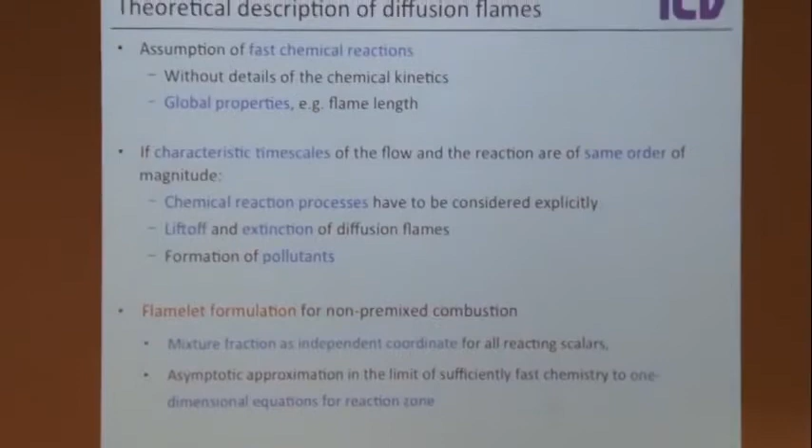Okay, so now we want to talk about the structure of these flames. We said the assumption of fast chemical reactions is... let's go back. Are there any questions about this before we move on?

Good question. What you see here is that relative to the mixture fraction, the flame position doesn't change, or it changes a little bit but not very much. But here, this 0 has no real meaning, you could say. That's why, where I put the 0 here is, in a sense, arbitrary. And I don't even remember exactly how the 0 point here is chosen.

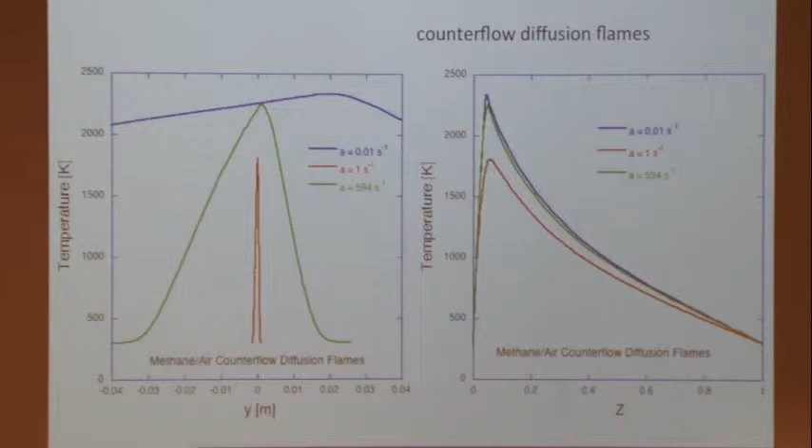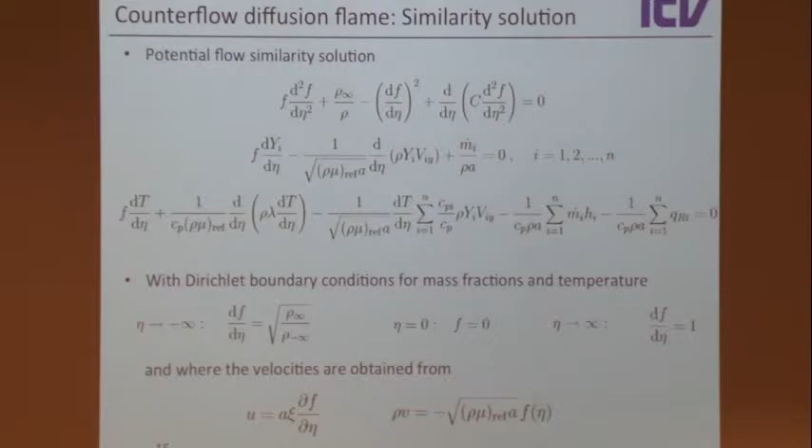Because what you saw in the boundary conditions is that we say the V velocity is positive, or let's say negative on the top, positive on the bottom, and it's 0 exactly at the stagnation point. So you'd say eta equals 0 would be exactly the stagnation point, but that's not how we do it, because that would be an internal boundary condition. So we specify something at the boundary, but I don't remember exactly what it was. So this is, in a sense, arbitrary.

You could shift this back and forth. Yeah, that's a good point. But in mixture fraction, you see they're all the same. Okay, other question?

Yes? How do we define the strain rate? How do you define what? The strain rate, the flow strain rate. How do we define the strain rate? Yes, the strain rate is, in a sense, an arbitrary definition, because again it's just a scaling parameter.

Here we just say... I mean, there is a definition of the strain rate in fluid mechanics, but for our purposes here it doesn't matter how we define it. So you could, for example, say the strain rate is the velocity from the top minus the velocity from the bottom, divided by the distance. That's one measure of the strain rate. Here we say it's du/dx at infinity.

du/dx is minus dv/dy by continuity. dv/dy, that's again the same thing: the average dv/dy is... what do you call it... the difference of the velocities divided by the distance of the nozzles, let's say. But here we don't have a nozzle, this is why it's at infinity.

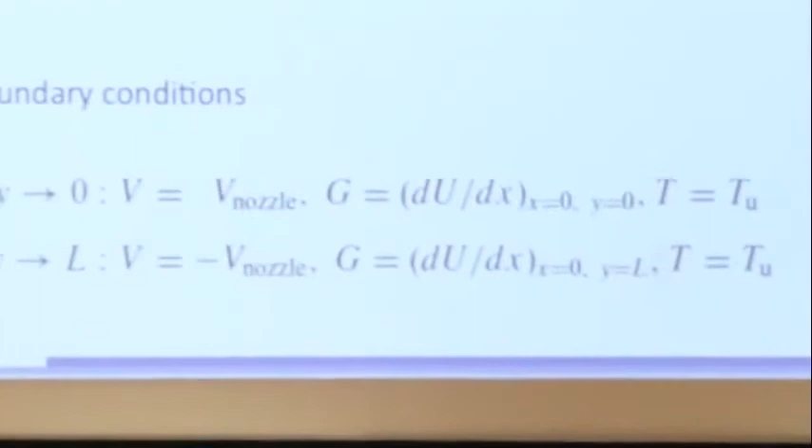When you compute this flow using equations that describe actual nozzles, there is no strain rate here explicitly. The G parameter is a measure of the strain rate - you can relate it back to the strain rate, or define a strain rate from it. What's more important is that when you compare with experiment, you use the same strain rate, the same definition. That's the most important thing. Exactly how you do it doesn't matter too much, but you have to do it in the exact same way.

How experimentally do we change the strain rate to calculate the extinction? How experimentally do we fix the strain rate?

Experimentally, what you fix is not the strain rate directly - what you fix is the velocities. You fix mass flow rates in an experiment, right? Mass flow rates and diameter of the nozzle give you velocity. Typically, when you run an experiment to find the extinction point, you increase the flow velocities while keeping the momentum balance - the momentum from top and bottom always kept the same. So you always increase both at the same time. That's one way to do it. You could do it differently, but let's say that's how you do it.

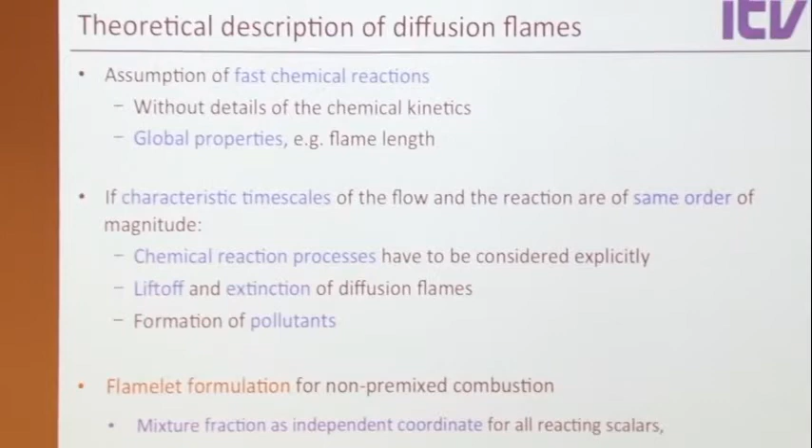We said earlier that the assumption of fast chemistry is sometimes good, but we just saw that if the flow timescale is small enough, the velocities are large enough, or the strain is large enough, then this assumption of infinitely fast reaction is not true. Also, for certain processes in combustion, the infinitely fast chemistry assumption doesn't hold. For example, look at liftoff - if a flame is lifted off, it means it wasn't fast enough to burn very close to the nozzle. Extinction also signifies finite rate chemistry.

Pollutants - I mentioned this earlier, the oxidation of soot, which is really fast, shown by the very sharp interface between the sooting region and non-sooting region. But when we look at how soot is formed, it's actually very slow - close to the nozzle there's no soot, and you see it slowly forming as you go downstream. So formation of pollutants, also NOx, is a very slow process, and the infinitely fast chemistry assumption is not justified there.

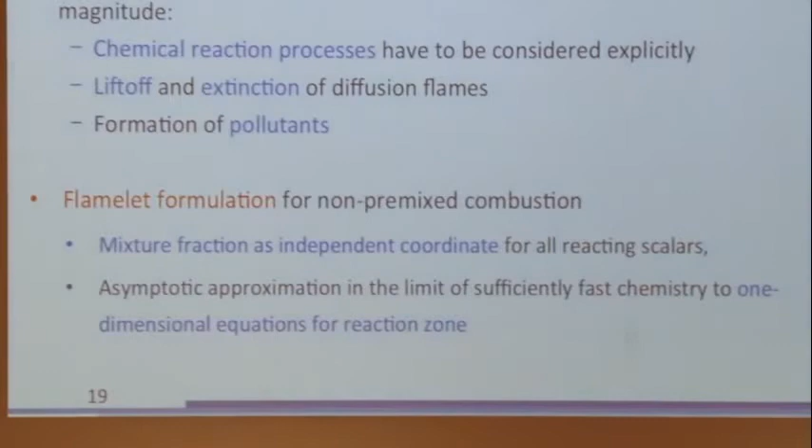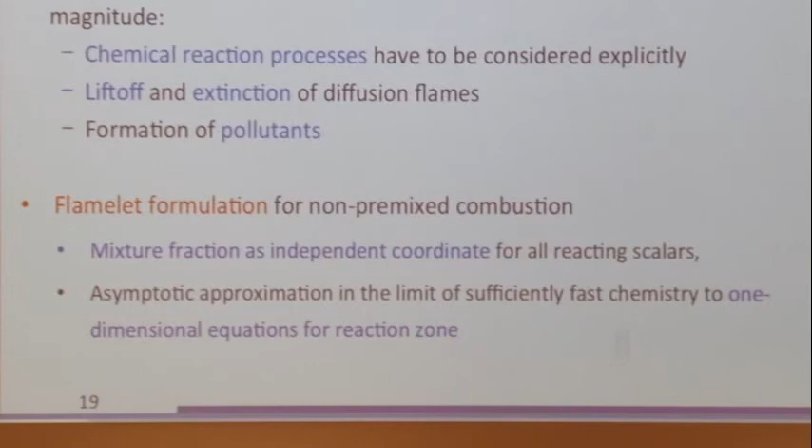So in the flamelet formulation for non-premixed combustion, instead of looking at a flame structure as a function of physical space - which we saw is not a good idea - we look at the flame structure as a function of mixture fraction. We introduce the mixture fraction as an independent coordinate, replacing one of the spatial coordinates. This leads to a system of equations which is still quite complicated. Using asymptotic approximations, we get to one-dimensional equations describing the structure of the reaction zones - fairly simple equations that also tell us a lot about the physics of non-premixed flames.